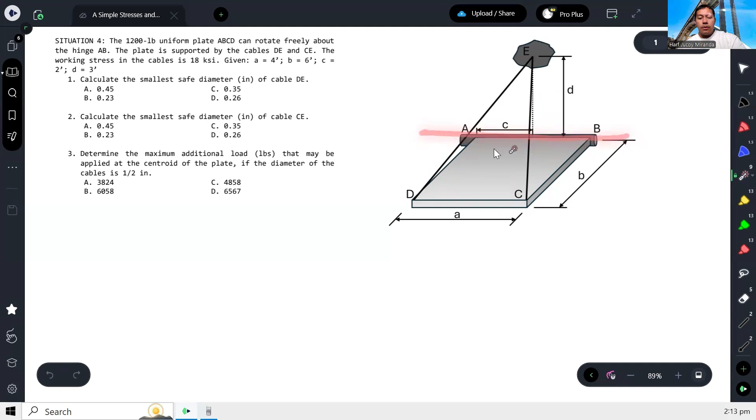So for the problem shown in the figure, this is a plate, and this plate is attached at this hinge. This means the plate is free to rotate about this axis, in this direction or in that direction. Now, because it's free to rotate about this axis, to avoid the plate falling down in this direction, they put a support using cables.

So it's attached at this point. Let's add the dimensions. A is 4 feet, B is 6 feet, C is 2 feet, and D is 3 feet.

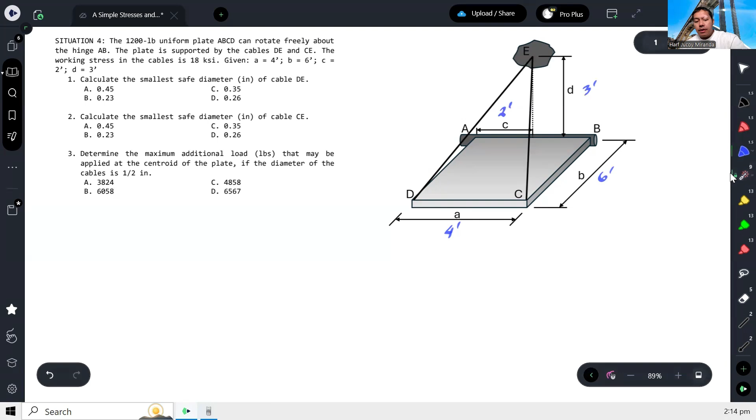For the questions: calculate the smallest safe diameter of cable DE, and calculate the smallest safe diameter in inches of cable CE. So we need to find the required diameter for these two cables.

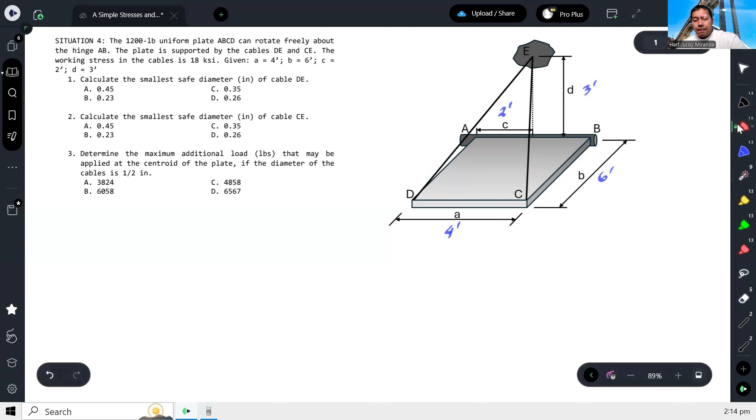To do that, let's draw the free body diagram of the plate. In the free body diagram, there's a tension attached here, let's call it tension D for simplicity. We have another tension here, let's call it tension C. And because it has weight, somewhere here there's also a self-weight, which is the 1,200 pounds.

Okay, then supposedly there's a reaction here, and a reaction here too, so there's a vertical and horizontal reaction at the hinge. Anyway, because I want to focus on calculating the tension in D and in C, the best approach

is to apply summation of moment about this axis. So we can apply moment about this axis.

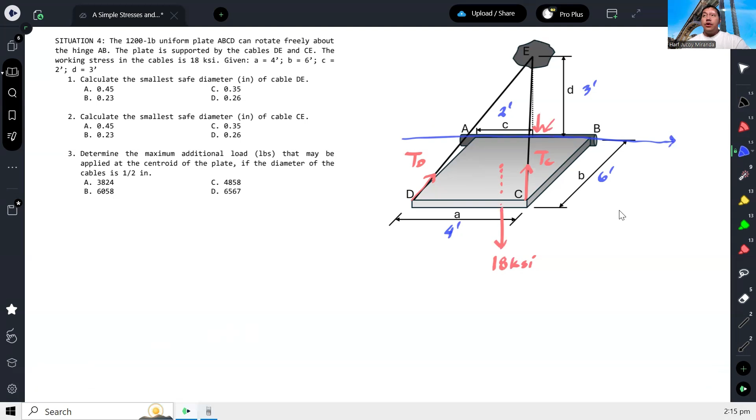All right, so if we follow the right-hand rule, let's say this is our positive axis. If you apply the right-hand rule or right thumb rule, the positive rotation will be in this direction. So that is the positive rotation.

Okay, so now before we can apply summation of moment, we have to make sure first that the tensions in C and in D are in component form, because it's difficult to find the perpendicular distance for this axis, or for that axis.

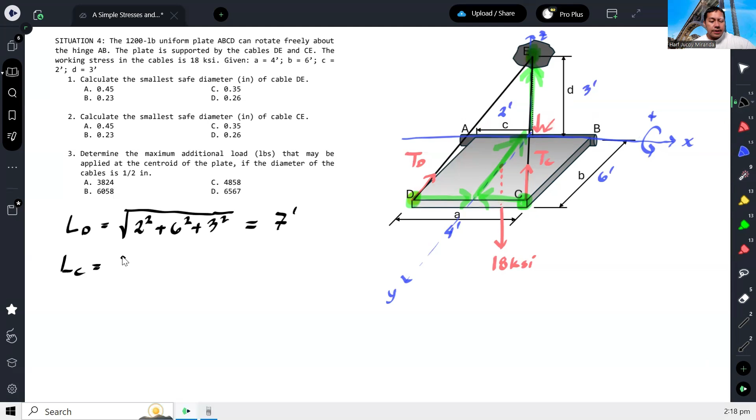Now using this, we can define the X, Y, and Z components. To be more specific, because I will be applying summation of moment about X, what's needed there, what rotates there, is the Z component. Why?

Kung titignan natin yung X component, dahil parallel yan doon sa axis of rotation na gagawin natin, wala siyang moment doon kasi parallel. Tapos kung titingnan naman natin yung Y component, mag-i-intersect yung Y component nitong dalawang tension doon sa axis of rotation, so wala tayong moment arm or zero yung moment arm. So ang meron lang talagang rotation is itong Z component.

Ibig sabihin, yung tension D sa Z-axis will be equal to yung mismong tension D multiplied by yung Z component natin na itong 3 feet, so 3 feet divided by 7. And likewise, yung tension sa CZ is equal to the tension at C times the same slope, 3 over 7.

Alright, so that is our Z component nung dalawang tension. And using this, we can now apply summation of moment about the x-axis, or about the AB axis. Itawag ko lang AB axis or x-axis. Using right thumb rule, ang mga iikot is yung Z component nito. So isulat natin, that is TD times 3 over 7.

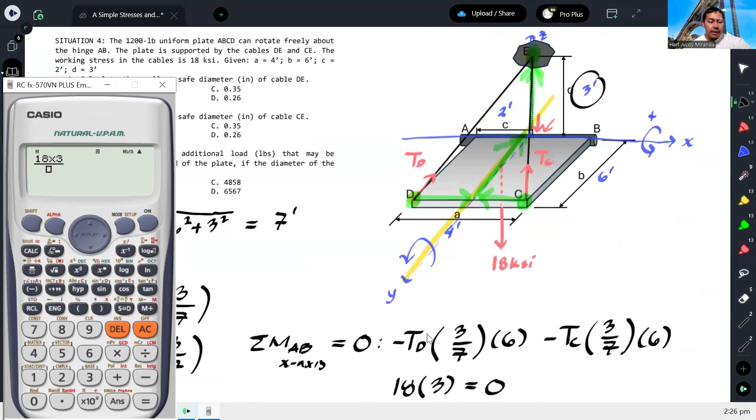So we have 18, so we have 18 times 3 over... KSI, ito no? So kips yung magiging sagot natin. Tama ba? 18 KSI. Sorry, hindi pala ito 18 KSI.

Ito pala ay 1,200. So yung 18 KSI pala ay working stress. So burahin natin ito, palitan na natin ang value. This should be 1,200 pounds. Tapos, ito, dapat 1,200. Ayan, okay, 1,200, yung weight ng plate.

So, it should be 1,200 times 3 divided by, okay, so since parehas na ito, no, or pwede nyo i-shift solve if you are not, if you do not want to do it or solve it manually. Kasi ang gagawin ko, ta-transpose ko ito sa kabilang side, so parehas na silang positive. Tapos, since parehas lang naman sila ng value, so parang pag inad mo, magiging times 2 lang. Tapos, di-divide lang natin yung 3/7, 6, at saka yung times 2 kasi dalawa sila. Kaya yun yung ginawa ko. So, 3/7 times 2, so, 700. So, ibig sabihin, each cable carries 700 pounds.

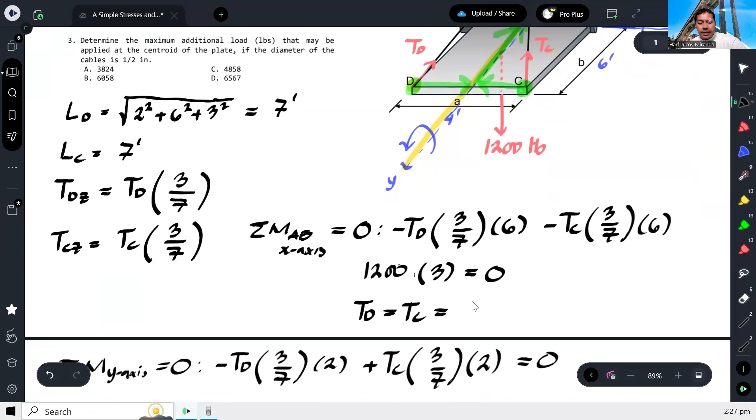Okay, ayan. So, now that we have the tension in the cable, since ang working stress nga ay 18 KSI, ibig sabihin, dapat yung stress sa cable, yung working stress or yung actual stress should not exceed 18 KSI. Or that is also, pag sinabi kasing KSI, kips per square inch, that is also 1,000 or 18,000 pounds per square inch.

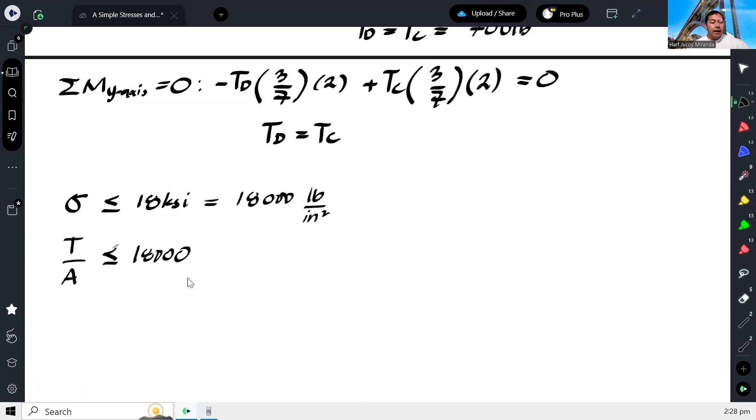Okay, now, what is the actual stress? Well, of course, that is just force or yung tension over yung area. So, 1,800 or 18,000, rather. Yung tension, we already calculated to be 700 pounds. So, ibig sabihin, 700 over area should not exceed 18,000. Consistent naman yung units dito kasi pounds ito naman ay pounds per square inch. So, kapag cross multiply natin yung A at divide natin yung 18,000, so magiging ganito, no?

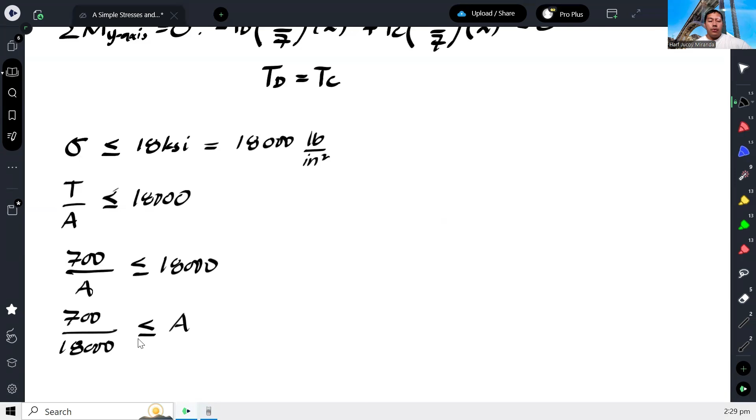Ayan, so the area should be greater than or equal to this value. Okay, and that value is 0.03889 square inch. So, dapat daw yung area hindi bababa sa value na to, o di kaya at least yan yung value ng area para hindi ma-overstress yung cable.

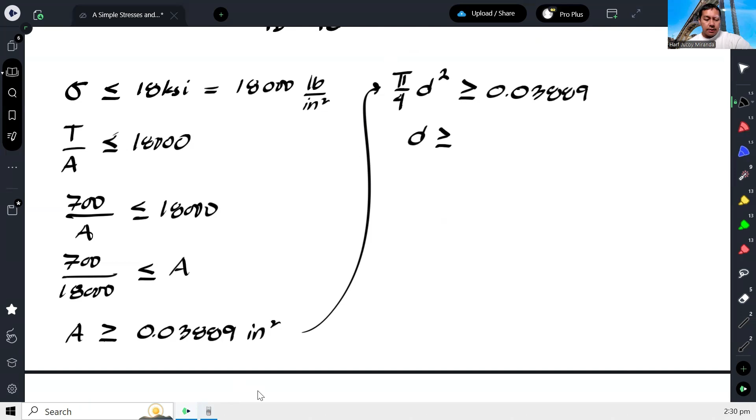So ngayon, furthermore, because ang tinatanong niya naman is safe diameter, so assuming na circular yung cross-section ng cable, edi ang mangyayari, yung area natin will be equivalent to pi over 4 times diameter of the cable squared, and that should be at least 0.03889. So therefore, solving for D, D will be at least, so anong gagawin dyan? Cross-multiply mo lang yung 4, divide mo yung pi, yung sagot is square root mo lang kasi may naka-square doon.

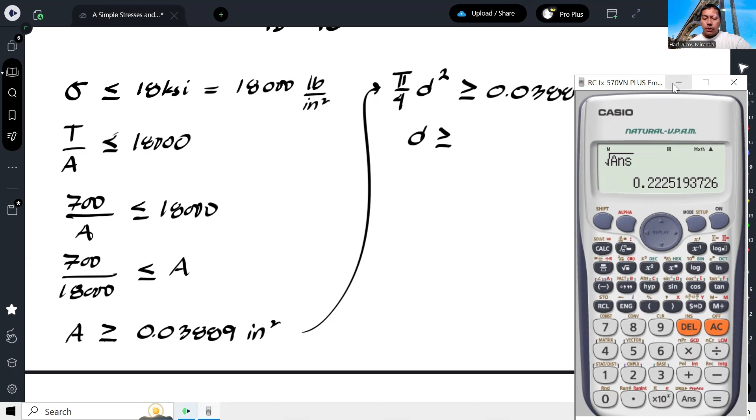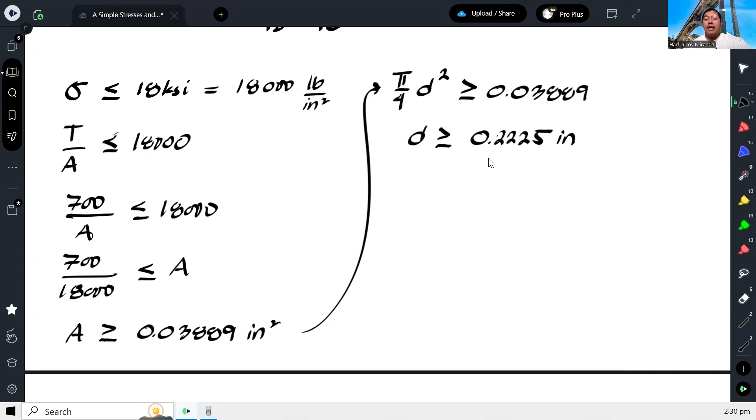So that's 0.223 or 2225. Okay, inches. So the required diameter should be at least 0.2225 inches. So in the choices, the best answer would be the next higher value, which is yung letter B.

Okay? At ito na rin yung sagot para sa number 2 since na-prove nga natin na yung tension sa C at sa D ay parehas lang. So ibig sabihin, yung required diameter nilang dalawa ay parehas lang din dahil yung working stress nila ay parehas lang din. So parehas lang lahat. Okay? So next, number 3.

Determine the maximum additional load that may be applied at the centroid of the plate if the diameter of the cables is 1/2 inch. So as you can see, kung i-compare mo dun sa naging required diameter 0.23, di ba ang 1/2 inch is 0.5 inch? So mas malaki, no? Mas malaki.

So ibig sabihin, tinatanong niya dito, ano daw yung pwede mo pa idagdag na load doon sa plate, on top of the weight ng plate para hindi ma-exceed yung, of course, yung working stress. So syempre in this case dahil mas malaki na yung diameter ng cable doon sa una nating na-solve, ibig sabihin kakayanin niya na magdagdag ng load doon sa centroid. So to calculate that, basically, no.